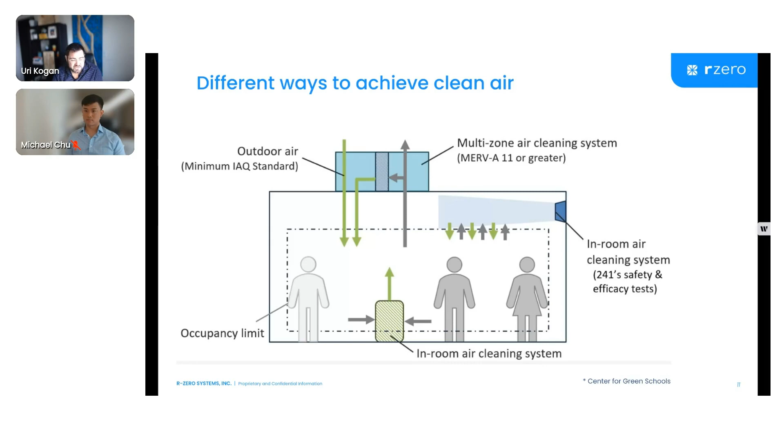You can clean the air in the space with an in-room air cleaning system, or you can clean the air with ultraviolet light shining across the top of the room, which we'll talk a little bit more about later. And all of those options, or a combination of those options, are all available to you to try to increase the clean air exchange in your space.

Now, the Department of Energy's Pacific Northwest National Lab just put out a piece of research a couple of weeks ago comparing some of these different options and how expensive they are in terms of energy use. So this chart shows you the kilowatt hours required to increase air changes just by 1. And remember, if we go back a couple of slides, the recommendation here from ASHRAE in a lecture hall is to go from just over 3 to just over 6.

In a gym, it's to go from 4 to 13. So this is not a 1 air change per hour increase. These are many air changes per hour. Just keep that in mind. But if you just look at it per 1 air change per hour, how much energy is needed, that's what this chart is all about.

And what it shows you is that either cleaning the air in the duct with UV, or bringing in more outside air, or increasing filtration from MERV 8 to MERV 13 filters, all of those options are very energy intensive. They use more than 2.5 kilowatt hours for every air change. So if you think that you're going to increase air changes by 3 or 6 or 10, you need to multiply this number by the number of air changes per hour. And that, of course, is going to add up very, very quickly.

On the lower end of energy use, you have portable air cleaners and in-room UV, either upper room UV or far UV.

The trouble with portable air cleaners is that they're noisy, which means people often turn them off. They're drafty. They create a feeling of air moving in the room, which is uncomfortable. Another reason people often turn them off. They're hard to maintain. You have to replace their filters.

So happens my wife is a teacher and had one of these in her room, and discovered a year after it was installed, when they came in to change the filters, that the original filters had never actually had the plastic wrap taken off of them. So it was not effective at all. So there are a lot of challenges with making these actually work in physical space, especially across a wide range of spaces like you have in a school district.

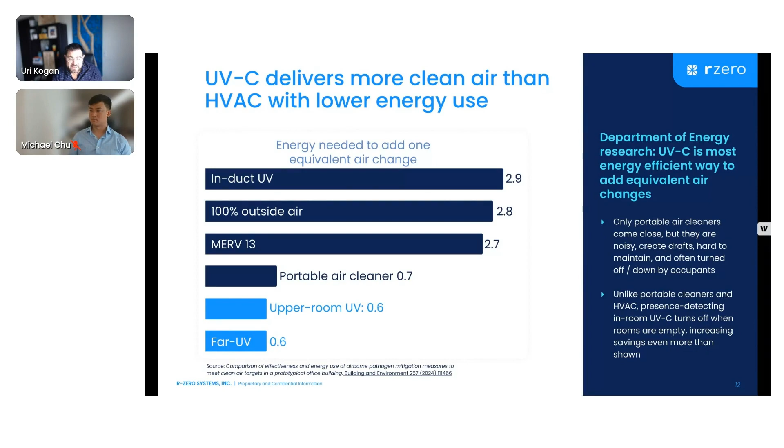In addition to that, upper room UV or in-room UV in general can turn off when rooms are empty. If it's able to detect presence, it can turn off when rooms are empty. So the amount of energy use that it requires is actually even lower than what's represented here, because this paper did not take into account the fact that UV can be turned off when no one is in the space. And of course, in a typical school building, people are only in the space a part of the time, not 24/7. And so UV actually comes out even better once you take that into account.

So let's talk a little bit about how R-Zero can help you in your submission package in greater detail. First of all, what is R-Zero? R-Zero is a building intelligence company, and we make a platform that delivers insights based on real-time occupancy and air quality data, uses that to give you recommendations and to directly control how you use your building.

A few examples of that are smart cleaning, which helps your janitorial team prioritize the spaces that got the most use that day. Energy savings and greater comfort by matching the ventilation that you provide to the actual occupancy in that space in real time, and measuring air quality in your spaces at the same time, and also improving HVAC filter efficiency. And air and surface disinfection with in-room and mobile UVC that helps to automatically and continuously kill pathogens and odor-causing bacteria while reducing the use of harmful chemicals.

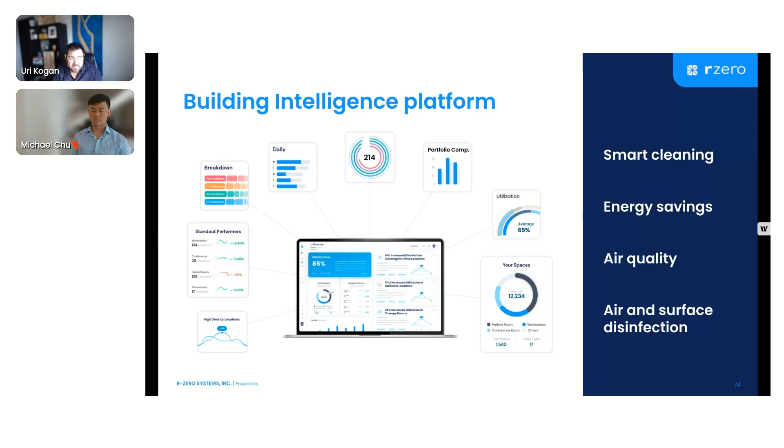So this platform sits on top of some pretty sophisticated hardware. Our monitoring and disinfection ecosystem includes everything from UV disinfection to occupancy counting and air and environmental sensors. So from the left here, you have ARC, which is our mobile UVC tower that you wheel around. We'll talk a bit more about that a little later. That disinfects unoccupied spaces, typically at the end of the day.

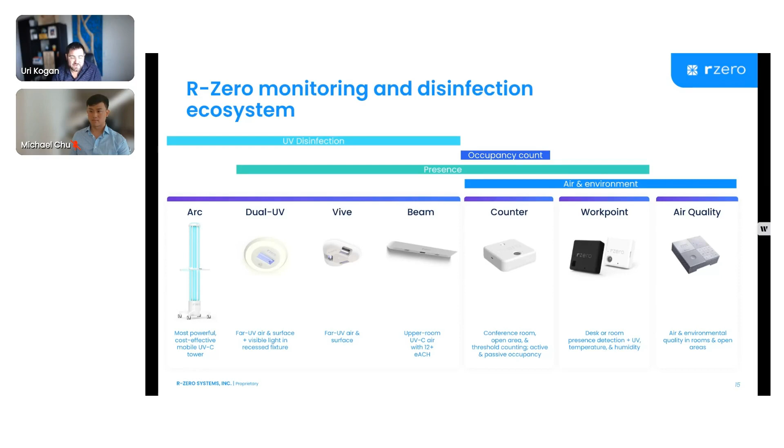We have a number of far UV products that are used in spaces where people are occupying them and you want to provide continuous disinfection. Far UV is completely safe for human presence. We have Beam, which is our upper room UVC product, which provides 12 or greater equivalent air changes every hour. And then we have sensors that measure occupancy, that measure presence, and that measure air quality. So using these sensors and UVC products, we're able to deliver the insights, the recommendations, and the direct changes to your HVAC system that I described on the previous slide.

So let's talk about air quality first. Why is air quality so important? Well, first of all, we just talked about what we've learned from the CDC and ASHRAE, and of course, what we all experienced over the last few years. But we all know that indoor air quality is also really important for our comfort, for our productivity, and for learning. But it's not really just the air quality that matters. It's also light and noise that can affect how effective people are at operating in a space. And that's why we also measure those in our sensor.

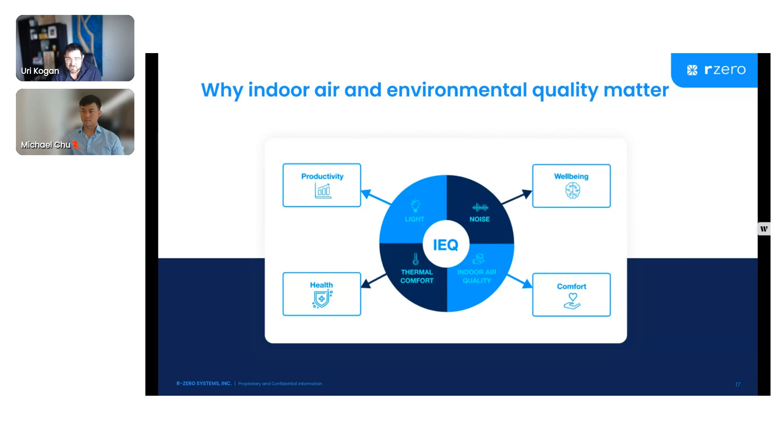So our indoor air quality offering rests on the foundation of the hardware that I shared with you, and builds on top of that sophisticated analysis that supports easy to use monitoring tools. And of course, on top of that, we also have the ability to control HVAC to ensure that you're able to moderate your HVAC use when possible, but also prevent any downsides that might happen to indoor air quality. We're always monitoring that indoor air quality.

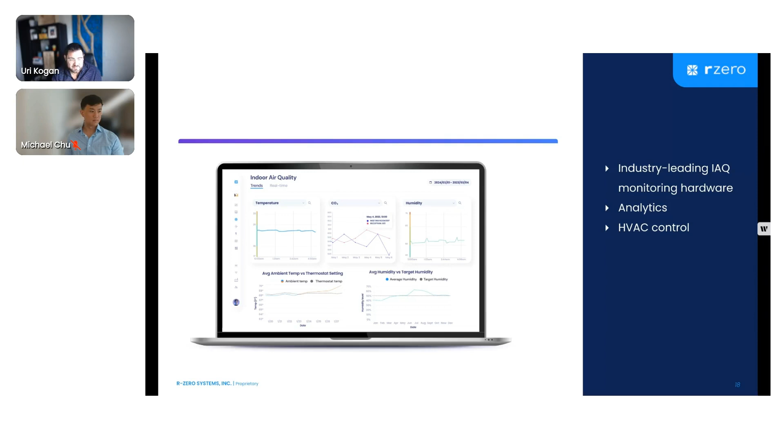So if for whatever reason you have low occupancy but an indoor air quality problem, maybe somebody burned popcorn in the microwave, for example, we will recognize that and be able to ensure that the HVAC is working and keeping everybody healthy and productive. So here are just a few examples of what the indoor air quality offering allows. And that's built, as I said, on our leading sensor. And this sensor is able to measure a wide range of parameters.

I won't go into all the detail on this, but suffice it to say that there's a set of parameters that are typically considered sort of standard indoor air quality measures. Those also are important for getting RESET accreditation. And RESET is a standard for accrediting air quality monitors that is often also used and referred to in other standards for healthy and clean and green buildings like LEED and WELL and Fitwel.

We also measure some more advanced indoor air quality measures. I'll call out formaldehyde here. Formaldehyde is an interesting one, especially if you are retrofitting a school or building a new school or bringing in new furnishings, oftentimes there's off-gassing from that material, and it's very often formaldehyde. And by measuring formaldehyde, especially when there's a new build or new material in the building, we can tell you, hey, this is fully vented and it's now safe for occupancy.

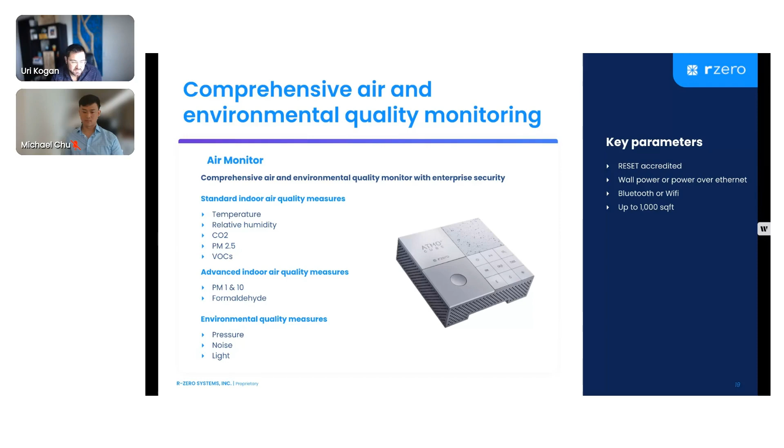And I already mentioned before the importance of also measuring noise and light, because those really help to ensure that a space is comfortable for its occupants. On the energy efficiency side, I want to talk a little bit about what we're doing to really take demand control ventilation to the next level. So demand control ventilation is basically the idea that you want to have as much ventilation as you need based on the number of people that are in a space.

And conventionally, this has been done by using CO2 sensors that are either mounted inside the HVAC return duct or sometimes on the wall. The problem with that method, which has been in use for about 40 years now, is that sensors are not very accurate. Depending on where they are in the room, the readings can vary pretty dramatically. They're also pretty expensive to maintain. They tend to need to be calibrated or replaced every 3, 4, or 5 years. And they're slow to respond.

So measuring CO2 is a proxy of how many people you have in your space. It's not actually how many people you have in your space. And of course, it doesn't respond immediately. So if 30 people walk into an empty classroom, that CO2 level is going to build up slowly. Eventually, it's going to trip the CO2 sensor to tell the HVAC system to turn on, but that might take 30 or 40 minutes, during which time people start to feel drowsy. The room starts to feel stuffy and generally not a pleasant experience.

If those 30 people then walk out of that room, the CO2 level is going to take some time to decrease. So meanwhile, the HVAC system still thinks it needs to be running to clean out that air, even though no one's in the space anymore. So that slow response time is pretty costly from an HVAC efficiency and energy perspective.

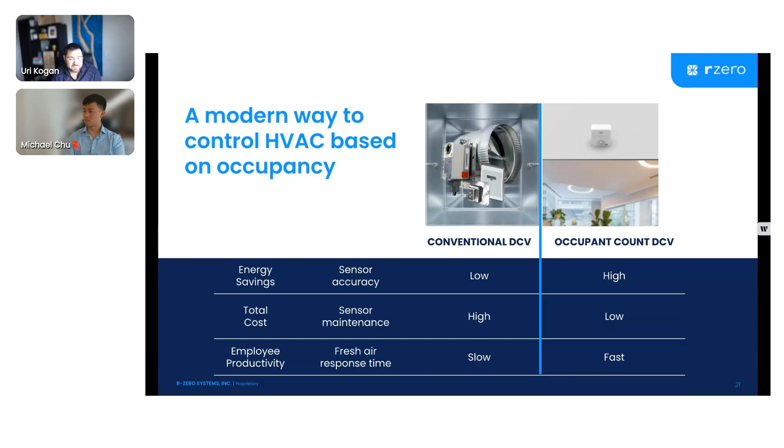And these sensors are less expensive to install from a hardware perspective, and they never need to be replaced. So the total cost of sensor hardware and maintenance is also lower. And because they're responding immediately, it's keeping people more comfortable as they go. So how does this actually work? As I said, when people come in or out of a space, we can detect that and basically keep track of how many people are in that room or passing through a particular HVAC zone. Our software then calculates how much ventilation is required in each zone and tells the HVAC to respond accordingly.

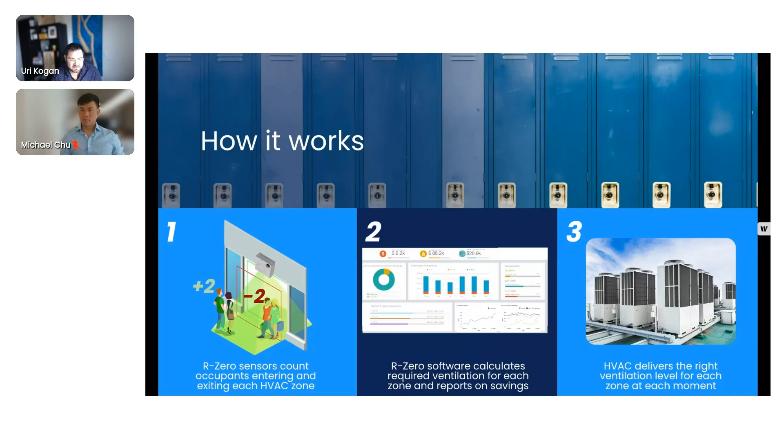And so here's an example of the impact that that can have. So the baseline here is continuous ventilation. Basically, it's running the same rate all the time, similar to the system you might have in your home. It's either on or off. The next kind of innovation on top of that is temperature-based controls. So this is where if the temperature is off by more from your set point, it increases the ventilation power to try to catch up. That saves about 9% on average across the US over just a flat on or off.

Conventional demand control ventilation using CO2 will save an additional 6%, or about 15%. And what we've now innovated with much higher accuracy occupant-based controls is another almost 15%. So it's almost double the amount of savings that you can get from conventional demand control ventilation. So it's a pretty dramatic increase over what's been possible in the past.

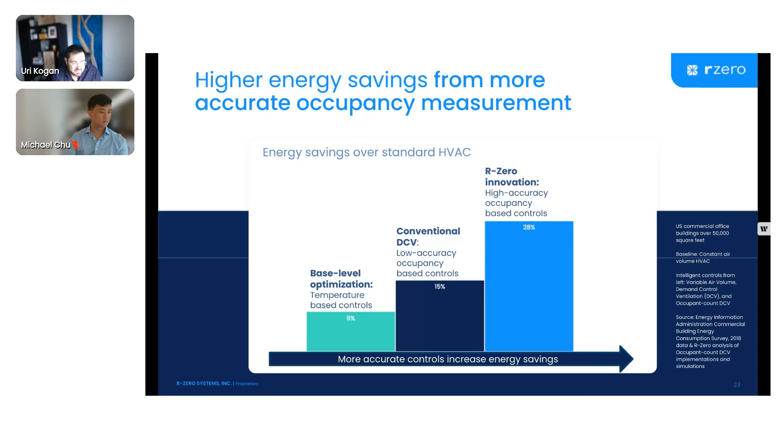And it really just boils down to making sure that the HVAC is aligned to how many people you have in your space in real time. And as I said, that increased performance not only has an energy savings benefit, it also means that people are going to feel more comfortable in that space. You don't have the lag. And as a consequence, you don't have the effects of that lag, like kids getting tired and being less productive in their learning environment.

Another way that we can help you save energy is by some filter innovations that enable you to achieve essentially the air quality or the filtration power of a MERV 13 filter without the energy penalty that comes along with that. We saw before in the energy department research that switching to higher level filtration does have an energy cost, and anybody who's done that has seen that in their utility bills.

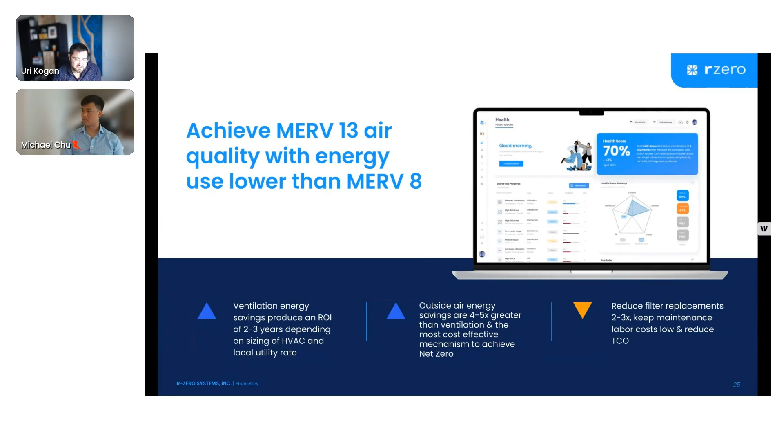But there are some really great innovations in filtration that allow you to achieve the high level of filtration without the same energy penalty. In addition to that, the filters that we have developed don't have to be replaced nearly as often, and that reduces the maintenance cost and reduces the total cost of ownership accordingly. Now, let me turn a bit to disinfection and tell you a little bit about some of our disinfection products that I touched on earlier.

We've installed beams in probably hundreds of gyms across the country. So it's a very, very powerful way of achieving a lot of equivalent air changes per hour very quickly and inexpensively. It uses very little power, about the same amount of power as a typical laptop charger. It actually has 4 LED lights in it, so it's a very efficient product. And it's only operating when people are in the room and for a short time after people leave, just to reset the pathogen load before occupancy resumes. So overnight or on weekends or whenever a space is not in use, it is not on.

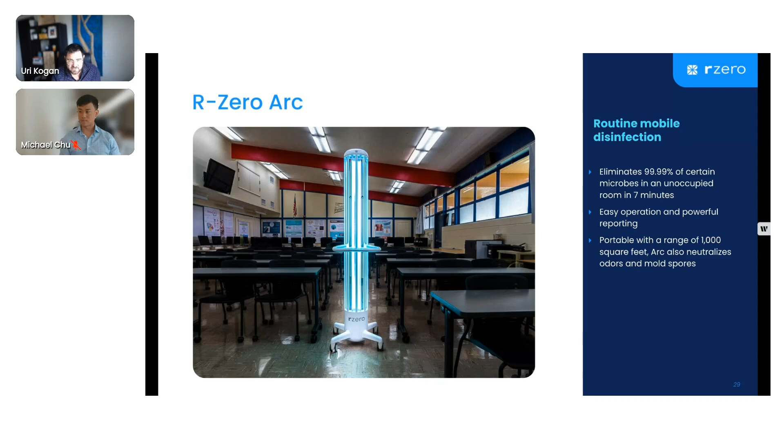It's very easy to operate. You literally wheel it in, hit one button, walk out, and come back in a few minutes. And it just plugs into a standard outlet. It can disinfect about 1,000 square feet. And just like the Vive, because it is disinfecting surfaces, it will neutralize odors. It will neutralize any mold spores that are on surfaces or floating around in the air. It's a really great product that's very popular in a lot of school districts across the country.

One thing I do want to mention is we did a really wonderful study with one of the largest school districts in the US a couple of years ago, where we installed beams in classrooms, libraries, and cafeterias in 4 different schools for 5 months. And we compared the results in those schools with a number of other schools where those were not installed.

The study was actually conducted by Dr. Edward Nardell of Harvard Medical School, who is a world famous expert on infectious disease transmission. And what we found was that we measured the presence of SARS-CoV-2 in the wastewater in the 7 schools that were in the study. And we found that in the 4 schools that had the beams, there was a 53% reduction of samples that had SARS-CoV-2 in the wastewater. So it was a pretty dramatic reduction.

There were no incidents, no complaints during the entire study. So it's a pretty powerful example of the benefit of disinfecting the air in the upper room with Beam. So with that, I think we will just about wrap up and just share with you that R-Zero has been deployed at scale by customers across a variety of industries.